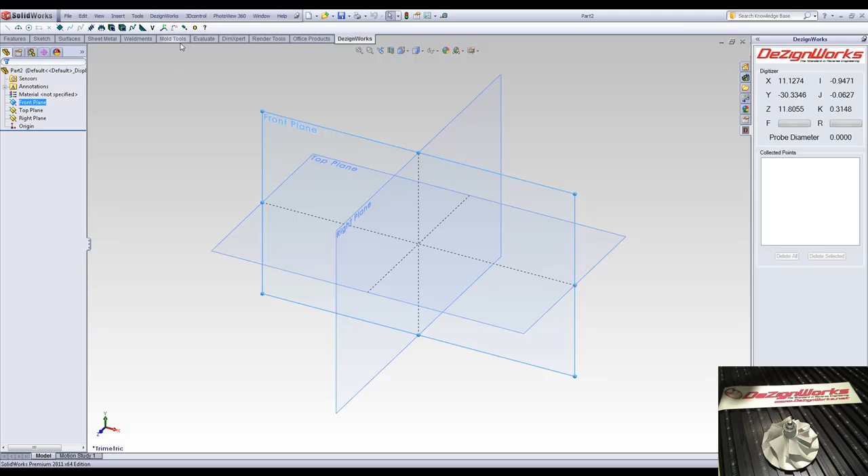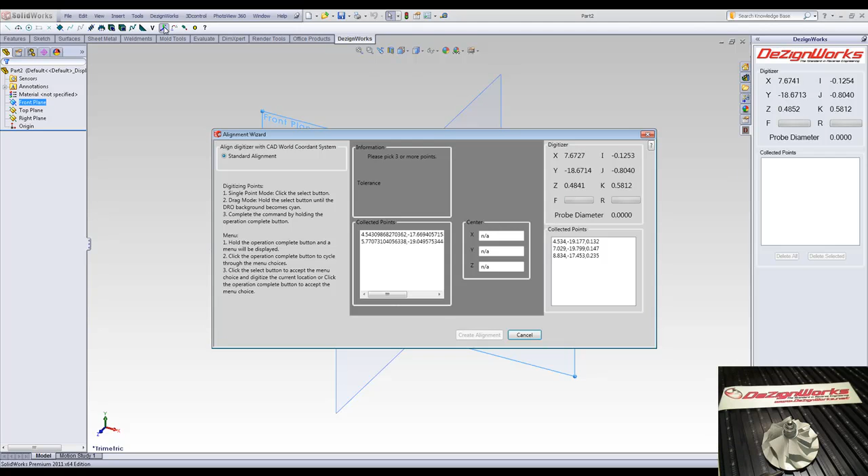So we're first going to create an alignment, and we're going to take at least 3 points to actually define a base plane. You can take more. They're going to be defining an X location, a Y, and in this case, we're going to do the origin as a circle, which matches the OD of the impeller. Notice most of the commands we're doing are being driven from the arm.

It's DezignWorks' new heads-up display. So once we do this, we're just going to capture the OD of this. We're going to use the DezignWorks circle tool and take at least 3 points. You can take more than 3, or you can even drag it. So we're capturing the OD, because our goal is to capture the OD, and then we'll use the locked plane tool to capture the profile, and then we'll revolve it.

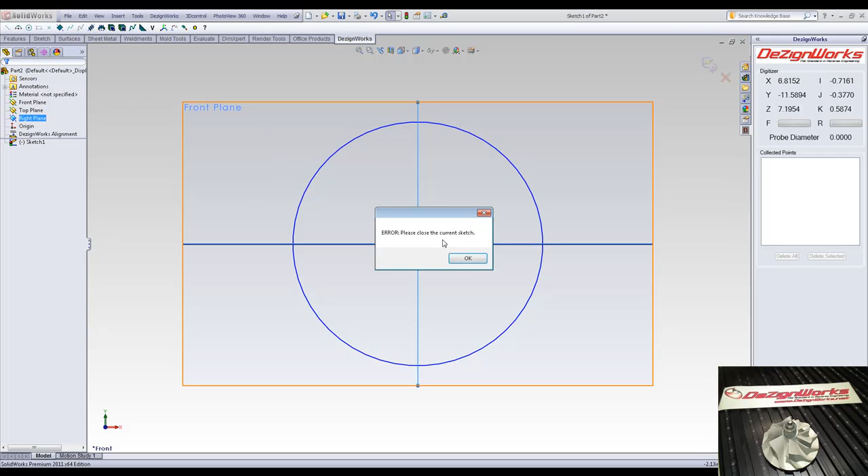So we're going to exit the sketch, and we're going to use DezignWorks' locked plane tool. What this allows us to do is go into scan mode. We want to scan the center, and we're going to put a profile on it. In this case, it could be a spline or points.

So we're going to grab this profile. What this allows you to do is pick a plane or multiple planes and drag it back and forth across the plane. In this case, it's the simplest form that we do this, is we're just going to create one cross-section and we're going to revolve it.

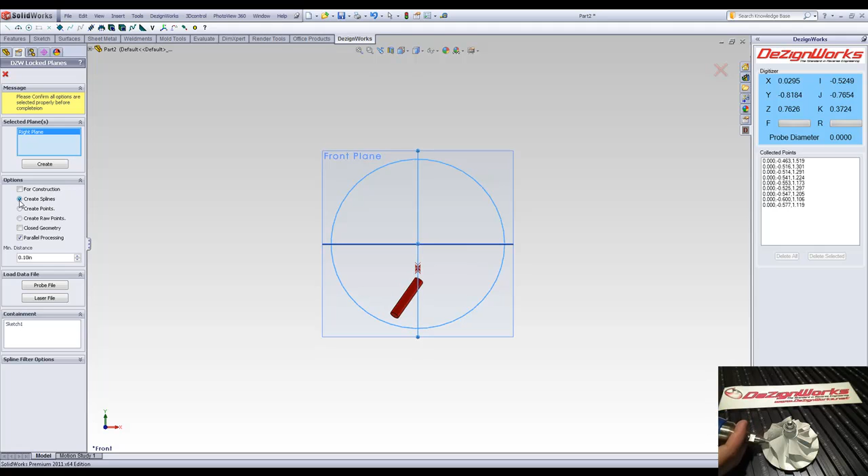So again, we're simply holding that button on the arm one time to press it and start scanning. You actually can go ahead and control the minimum distance that you want between points. In this case, we said 100 thousandths. You also can control where it trims to.

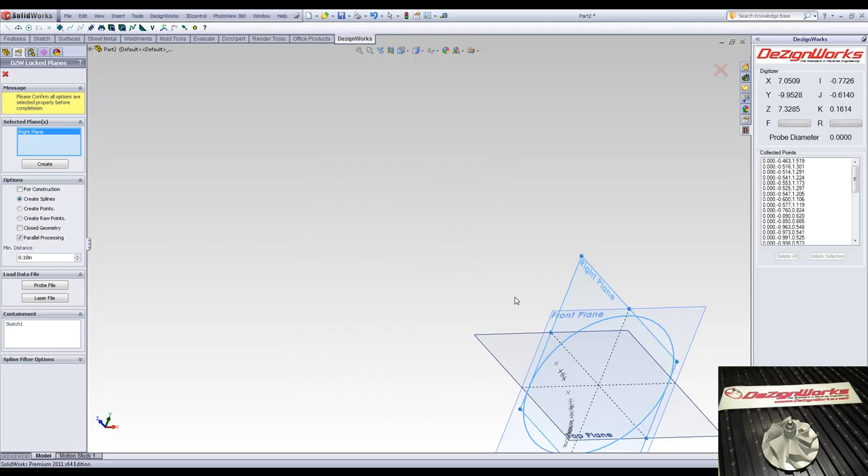So once you have enough, you can rotate the part to see, do you have enough data? And you can actually add more. So we're going to add a little bit more right in the middle here. The nice thing about this, it projects it all to a sketch, and you can modify and change it. So we actually have enough data there. So there's the profile for the hub of the impeller.

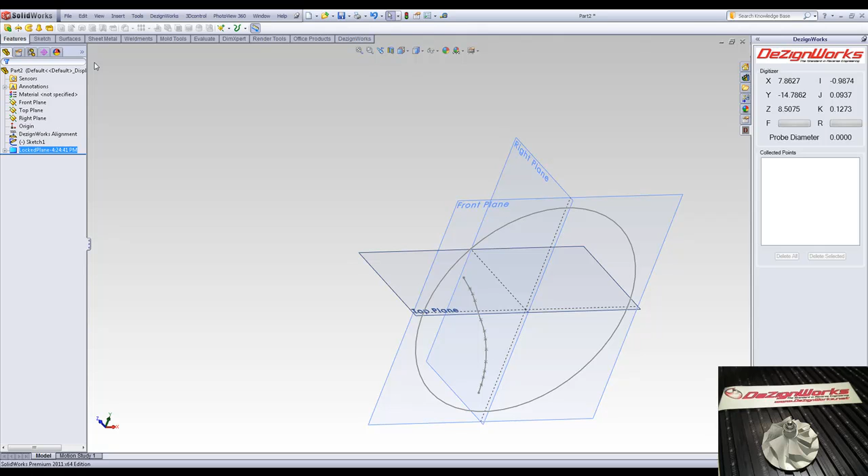So we're going to go ahead and use some of the SolidWorks tools. We're simply going to go ahead and just revolve this. That's why we created the origin around the center of the hub.

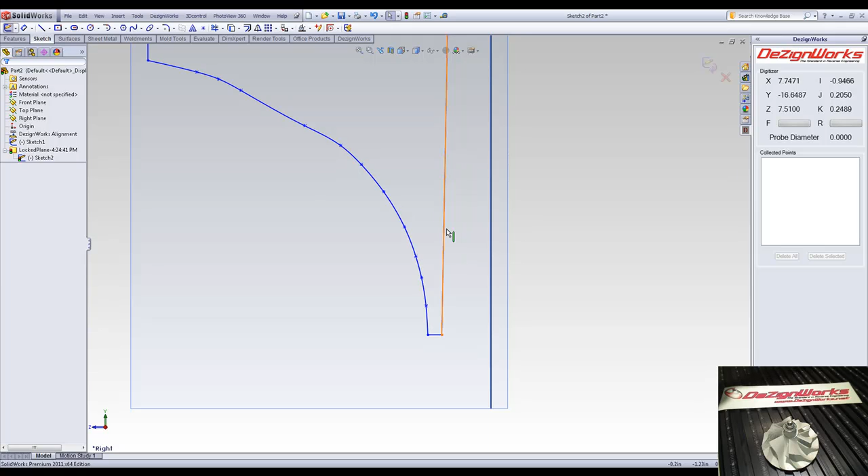Now we simply sketch some SolidWorks data. The nice thing is you can mix and match all the tools together. So you can see we captured the profile with DezignWorks, and we're capturing the sketch there. Now we're drawing with SolidWorks, kind of tracing down the center line. Now we'll just go ahead and revolve it.

And there's our hub. So the next step we're going to do is utilize the 3D sketch in SolidWorks. What we're going to utilize is the fill surface. So we're first going to grab some boundary containment points.

So we're going to start a 3D sketch, and we're going to use DezignWorks to take some points. Now these points are going to be inside of the boundary that we're going to use for the fill surface. The fill surface tool is like actually dropping a drape over a boundary with some control points. These control points actually pull the data down to the middle section of it.

So we're going to grab these first, so I don't have to reorder it later. So we just take a few points and we finish it. So we capture the points with the arm and DezignWorks. Now we're going to go ahead and start another 3D sketch. And this is actually going to be the boundary.

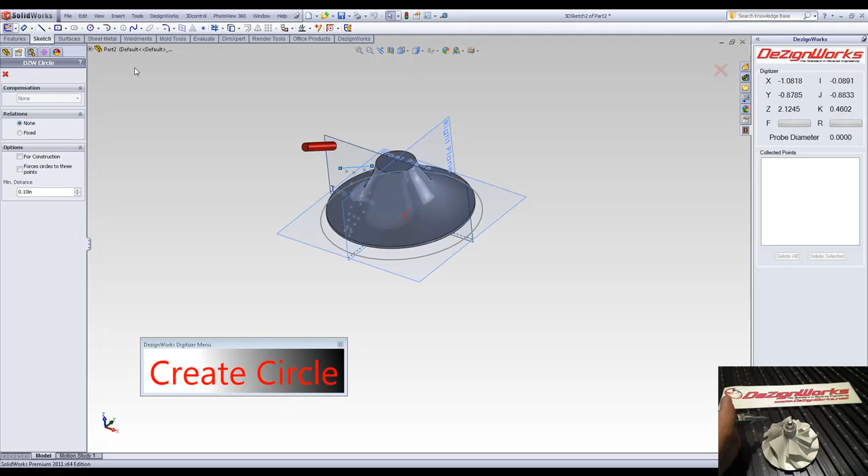So we're going to go ahead and start another 3D sketch, and we're going to actually outline the blade. So across the top, it's fairly straight. We're going to create a line. And now we're going to go ahead and actually create a spline close to the edge of this. Now the heads-up display you see is we're pushing the buttons on the device to actually go grab that spline. So we're going to take some points along this edge.

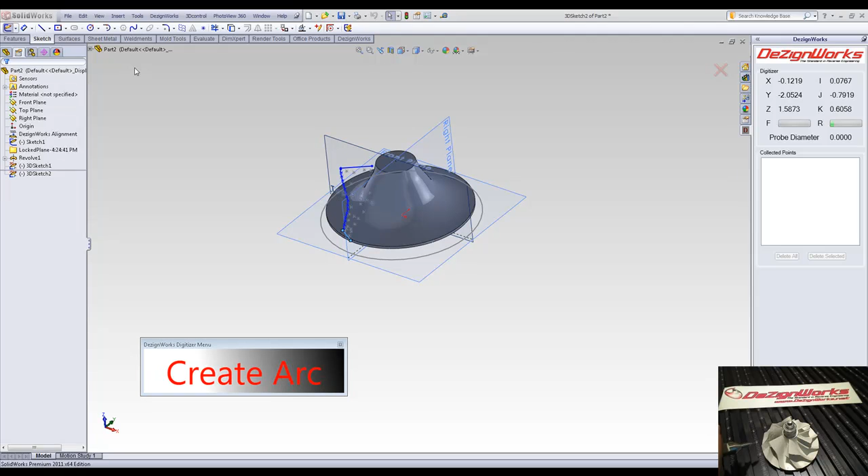Now we'll go ahead and do the line, and then there's one more spline on the other side. This can be done in several different ways, but by doing this method we can actually extend this a little nicer. Now we're going to grab the data close to the inside of the hub, depress the button and drag the probe down through there to capture the other side.

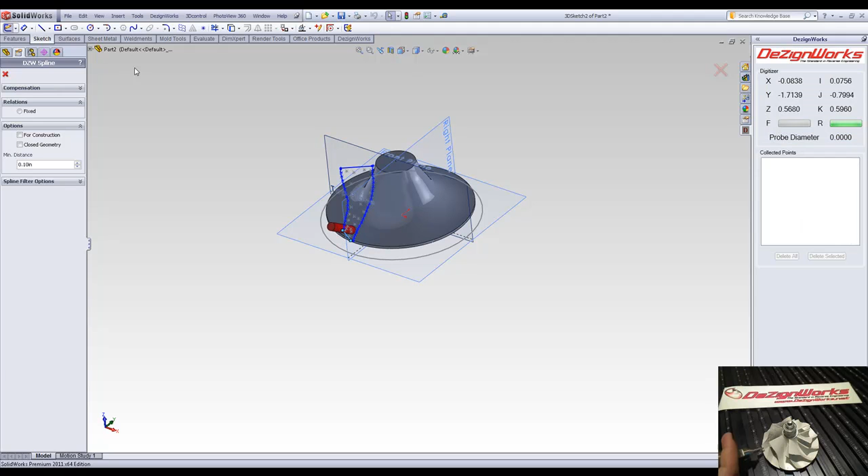So now what we have are our curves. We're going to go ahead and lock down the lines, and then we'll pull that data from the splines into the lines. We'll use the constraint of SolidWorks and fix those.

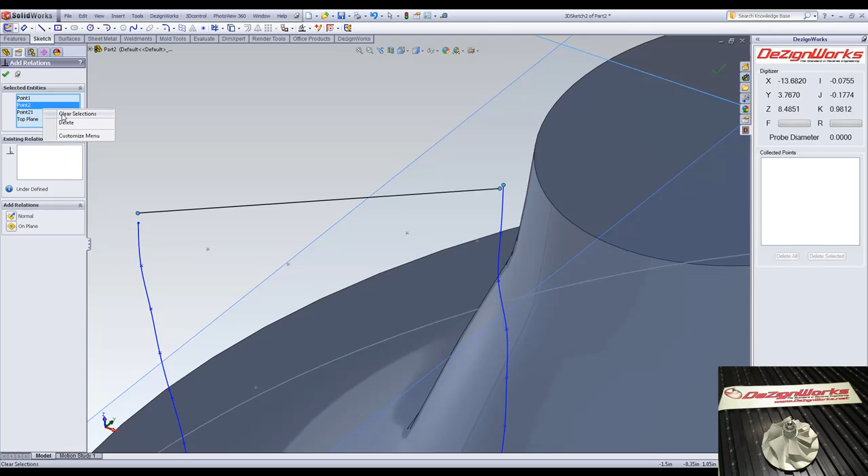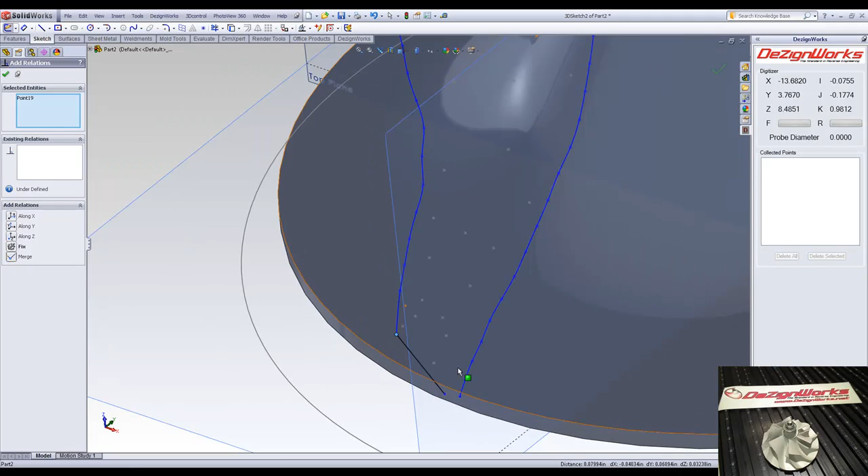Now we'll go ahead and put these ends together, and then merge the endpoints, just using normal SolidWorks tools. So again, we'll pick a point and merge these. We'll do one more. Now we have them merged.

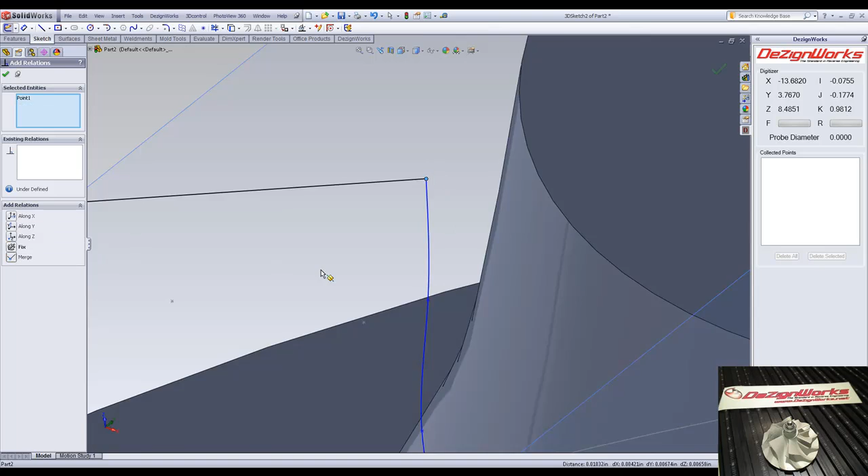Now what we're going to do is get out of the sketch and use the fill surface tool. For some of you who don't know this tool, it's been around for a long time and it works great. The boundary was the fill, and the control points help pull this down, which makes the mathematics even more precise.

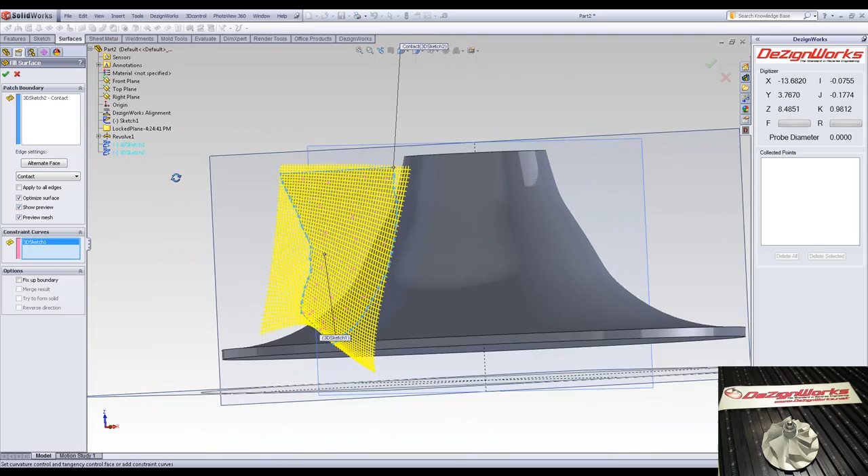So we're going to save our part now, and we're going to show you the validation tool with DezignWorks. Let's show you the accuracy of how this fill surface tool works. DezignWorks Professional allows you to validate your model during the reverse engineering process.

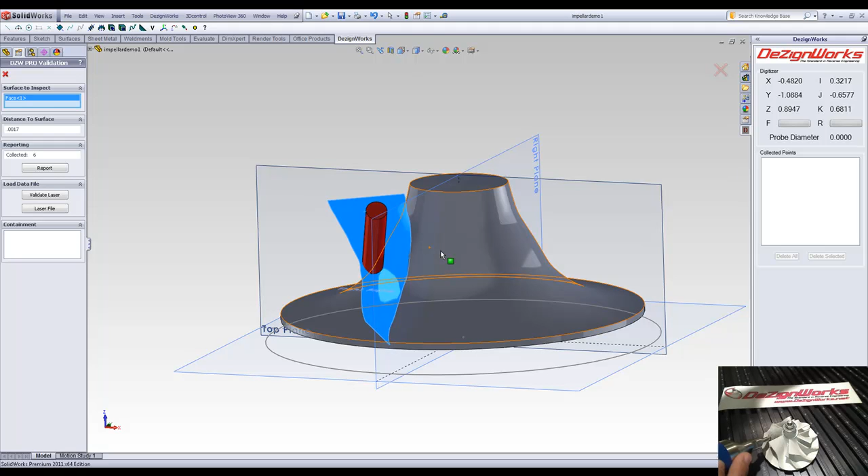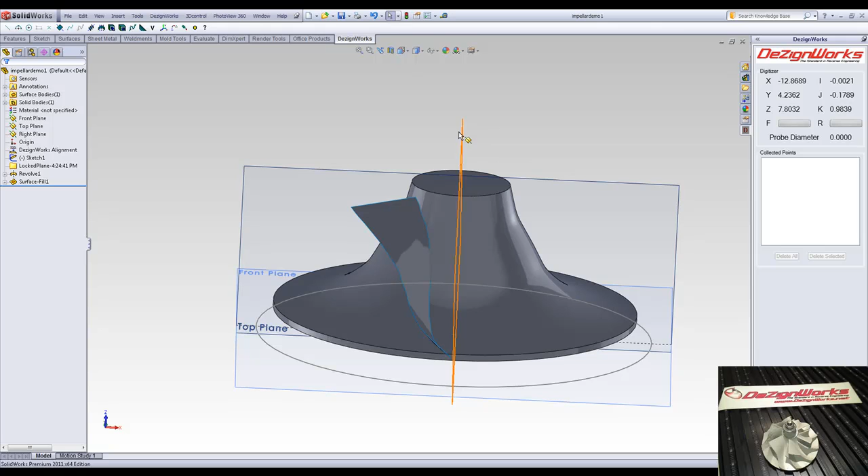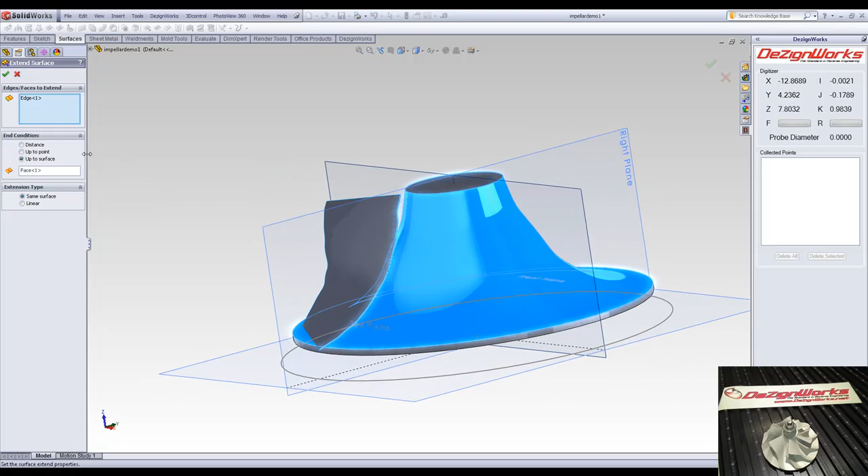So now we're going to go ahead and extend that up to the hub, extending that blade. Again, this is one of the reasons we did it the way we did — we can extend it by the edges. You can drag that around with the spline and get the same results, but with the method we did, we can control the extending better.

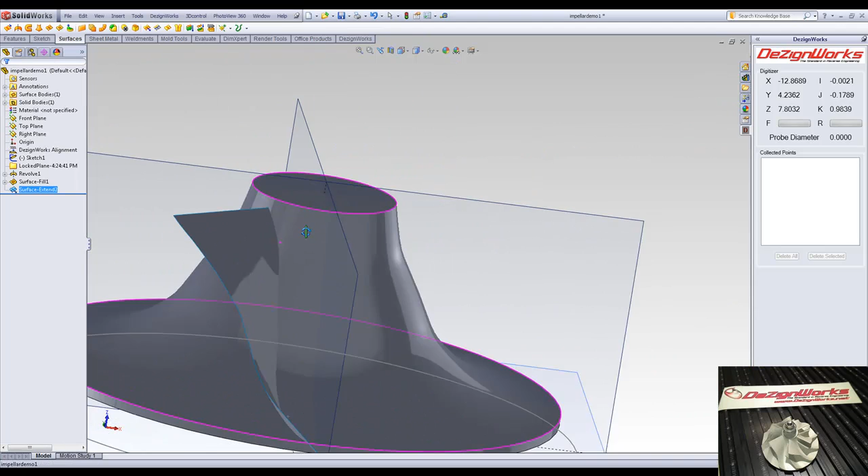So I've extended that. We'll extend the other one too, because we're going to trim this a little later. We're going to trim this off. So now we have about 90% of this done, and if you notice, it's been less than 10 minutes.

Now what we need to do is trim the outside profile. We're going to capture data on the blade and then convert it to a plane, using DezignWorks to get this data on the edge of the blade, because we still have to trim this off out here.

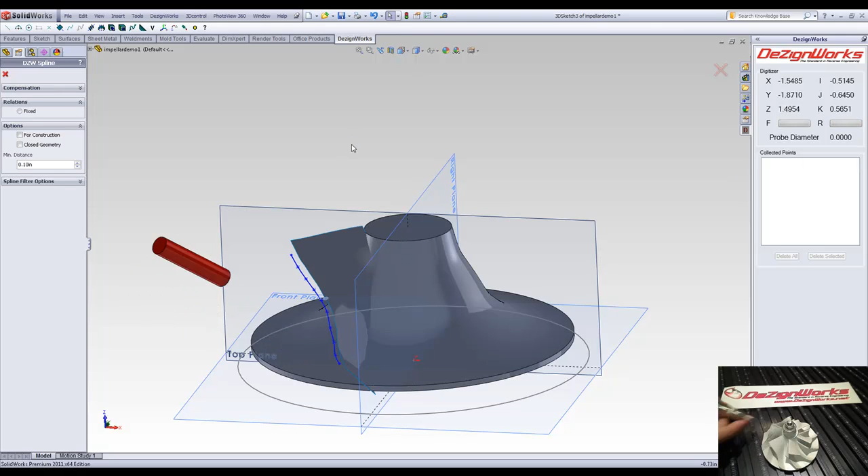So we're taking points right on the edge of this blade. It's about 30 thousandths thick. We're using a point probe to capture this data, and we'll use that as our trimming data. We're actually going to project that to a plane — it's the best method we found to be able to trim this.

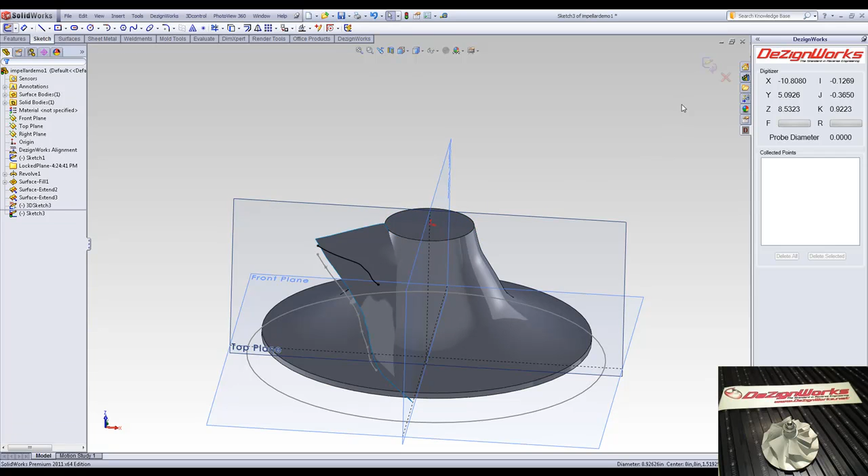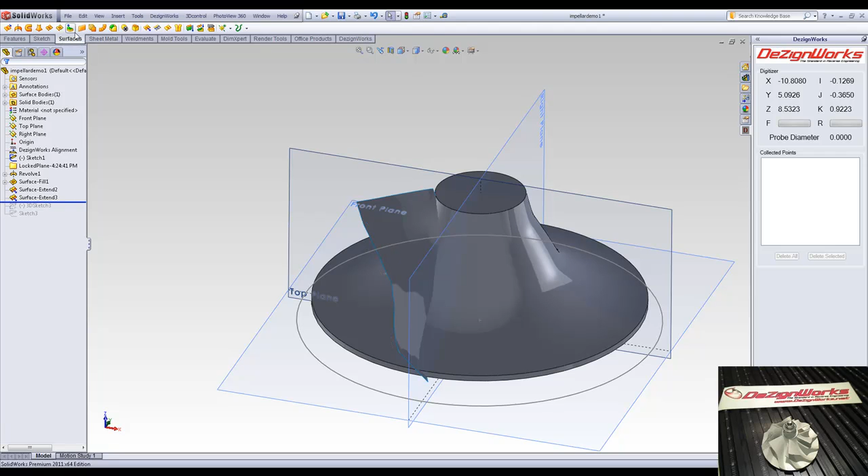So now that we have this, that's the real edge. We'll build another surface, and then use the SolidWorks surface tools to trim that edge off. So now we've extended that original edge, and now we're going to trim it off, having the blade trimmed to the outside profile. We're going to go and finish this up.

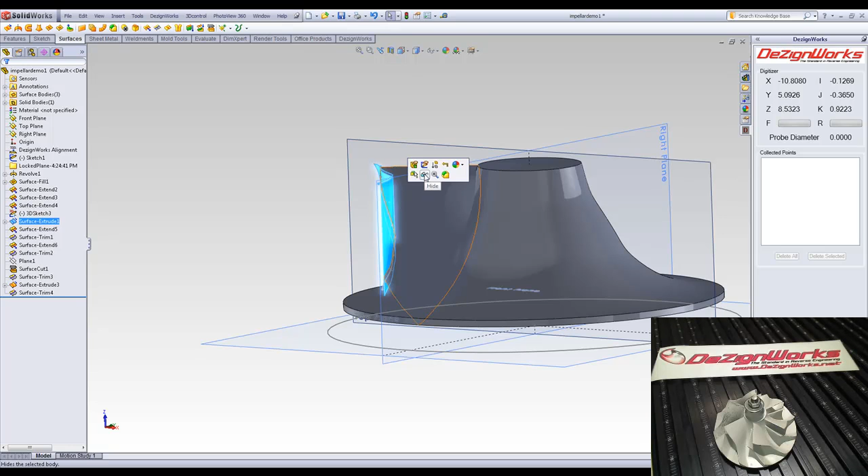So we're going to go ahead and trim it off, and now we're going to go ahead and give it some thickness — around 30 thousandths, we believe. Now we'll go ahead and simply revolve it.

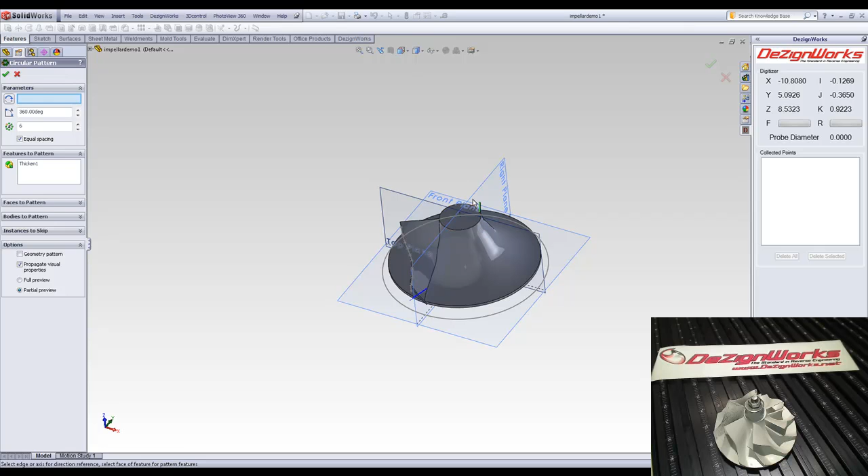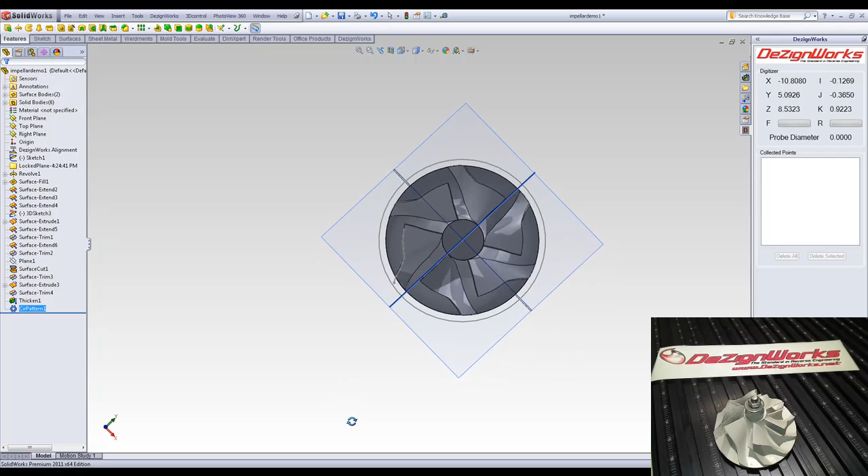You simply pick the number of blades you want, and there you have it. You can see in under 10 minutes, we've created 90% of the blade. Tune in next week for more updates and parts on DezignWorks. Have a great day.